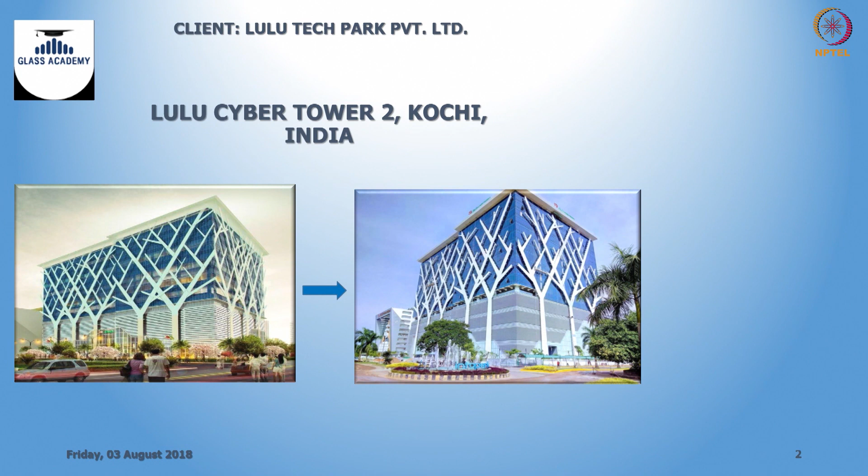Let us go through the details of this particular facade. It is a ground plus 19 building, having from around the 9th till the 19th floor commercial space. It is normally a fully cladded building for high energy efficiency.

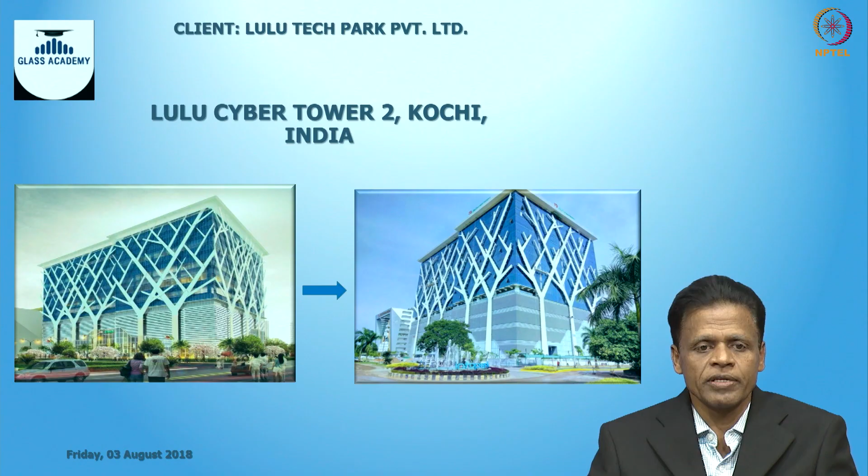If you see the building up to the 8th floor, it is used for a multi-level car park, where we used a technique of ventilated facade using louvers and rain screens. In addition, on every elevation we have a concept of a tree growing from the ground till the top of the building. This aspect makes the building unique in the space. I think it may be the first time in the country we tried something like that.

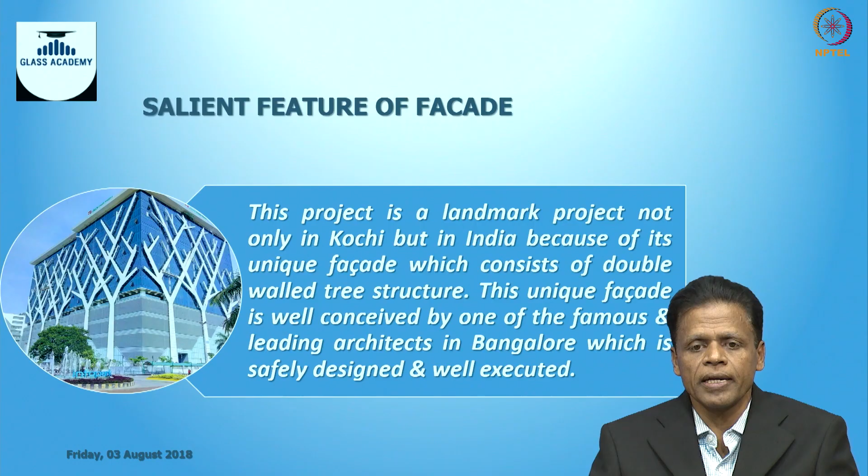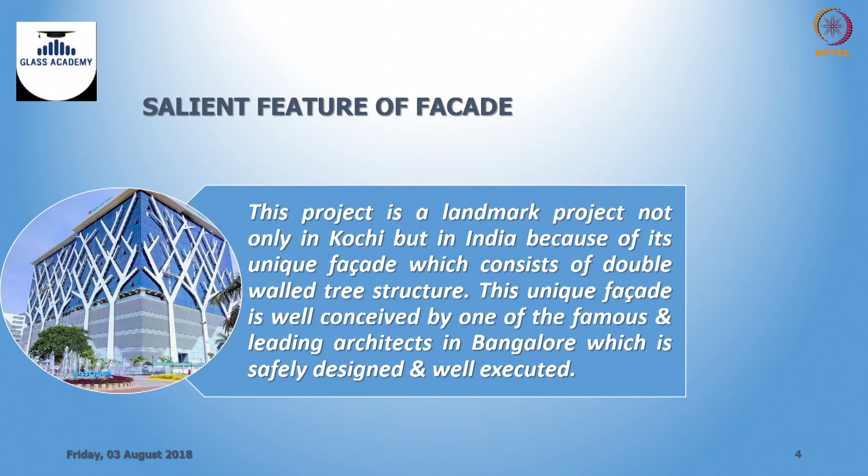Going for the project details, we have a big project having around 1.5 million square feet of space, out of which around 1 million is for commercial purpose, and one floor is fully dedicated for common space, food court and all, and the lower areas dedicated for parking. It is good for around 1000 car parking.

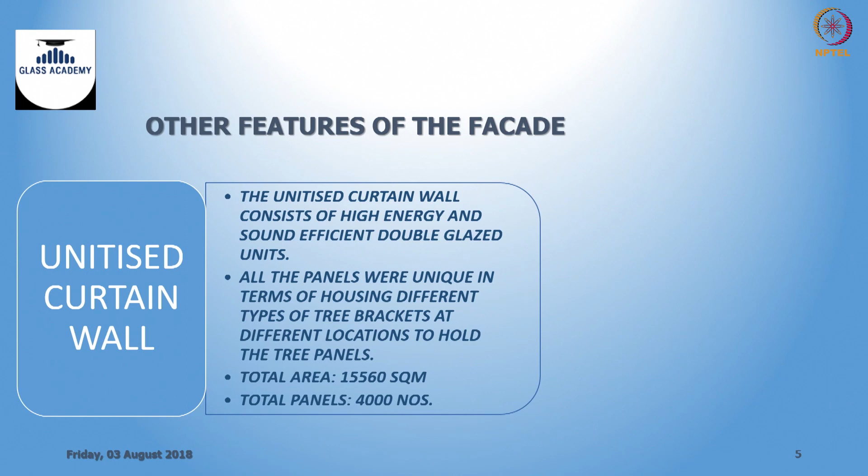So coming to the features of the facade, we have a unitized curtain wall. It is a highly energy efficient facade, and all these panels are designed in such a way that they can carry the load of the tree panels also.

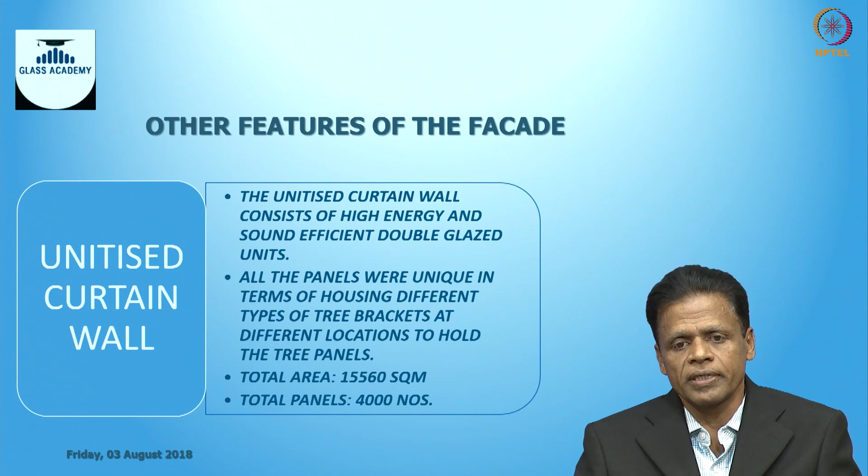If you see further slides, we have trees which are designed growing from the ground, but not touching the ground. So the panels from ground till the roof are attached to the facade, and each panel, around 3 meters high or floor to floor height, is hanging from the facade.

So it is not the construction technique of building one above the other, even though it visually gives the impression that it is built like that. Actually, these 6-inch thickness tree panels are produced and hung from the facade. So facade design was also a challenge, where it had to satisfy all the facade requirements and the additional function of carrying these tree panels individually.

So the challenge was very high, because in the unitized system itself we had to find space to accommodate hidden brackets, which will be connected to the tree panels separately by brackets, which you will see in time.

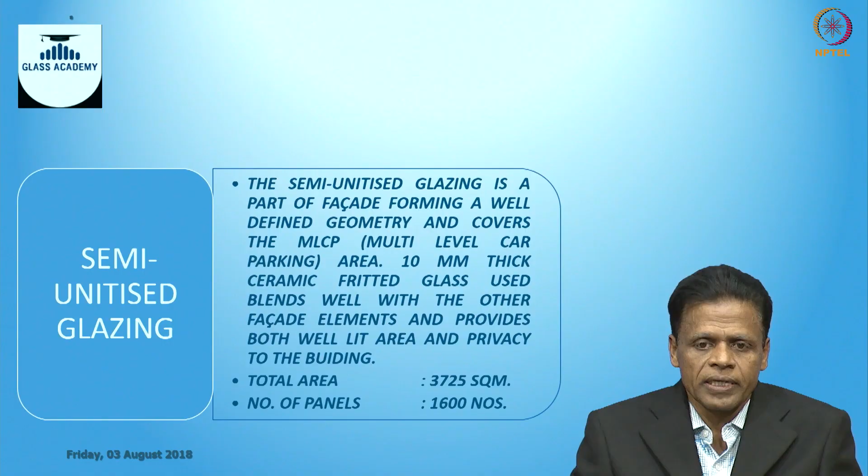In this MLCP area, we split this building into two: above the 9th floor for commercial space with the facade, and down to the 8th floor we dedicated for car parking. The requirements are also totally different, as this area is not an air-conditioned area. We need to have sufficient ventilation and light.

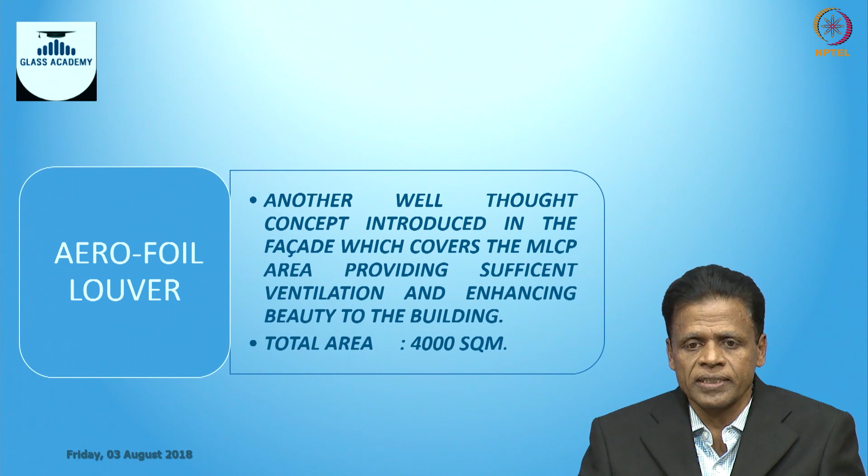For the bottom portion till the 8th floor, we designed a normal curtain wall, semi-unitized, split into 3 different areas. One is a rain screen having ceramic frit glasses, another is a Kalzip area, where a special kind of cladding is provided to break the monotony of the building till the 8th floor, and we have aerofoil louvers which ensure sufficient air circulation in the building.

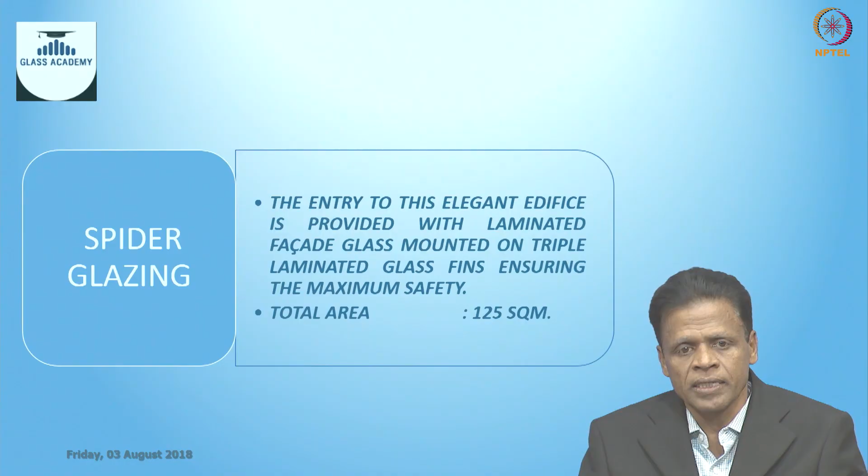And there is a special entrance for the building, shown in the next slides, giving a very grand look for the building.

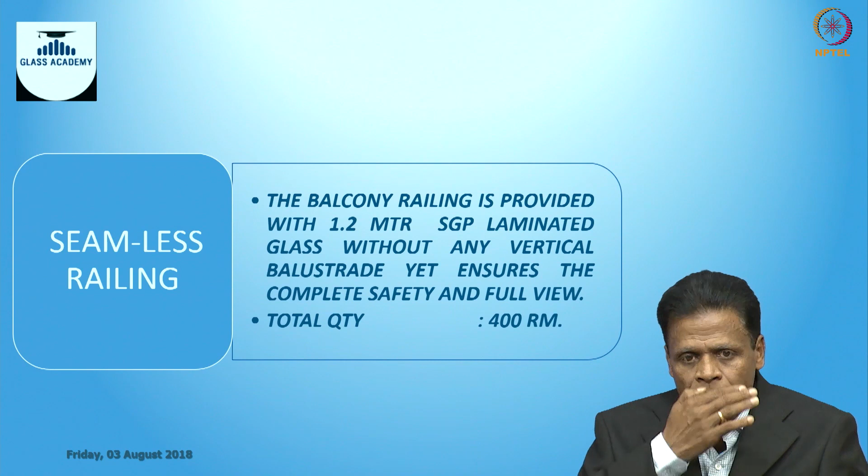And if you see the 8th floor, it is almost like an open concept where 2 to 3 meters of the periphery is open for free movement, with a railing which is totally frameless, with no vertical supports — we call it seamless railing.

If you see the quantity summary, the building is provided with around 16,000 square meters of unitized glazing. We have tree panels of around 6,000 square meters, comprising 16 trees growing from ground to terrace. We also have semi-unitized glazing for the lower area, which includes 3,700 square meters of rain screen, around 4,000 square meters of aerofoil louver, and an additional Kalzip cladding of around 1,100 square meters.

If you see the entrance, that grand look is given by providing around 125 square meters of spider glazing, and we have almost 400 running meters of seamless railing around the building periphery at the 8th floor.

This is a unitized building from the 9th to 19th floor. It is a normal unitized building. The entire area is cladded with vision panel and spandrel panel.

The only difference in design is that every panel, wherever required, has a provision given in the form of hidden brackets. The extrusion design itself takes care of that space, with a special space given in the shape of a Z which can carry the hidden brackets. Later this will be connected to the tree panels.

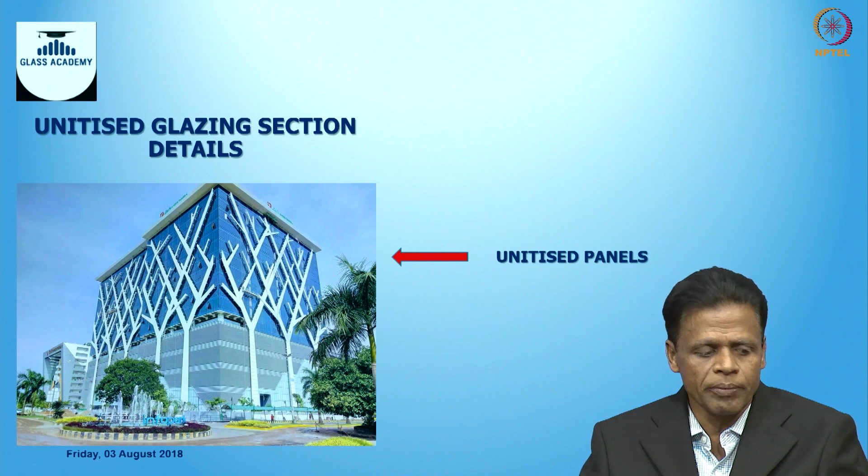Surprisingly, this particular tree panel is also all unitized construction. There is a frame all around giving provisions for bonding with the outer skin and inner skin, and this skin construction is by solid aluminum sheet of 3 millimeters which is powder coated with 25-year warranted powder. This is the tree panels.

If you see, up to the 8th floor we call it the tree trunk, since it is starting from the ground. From this slide you can see it is around 3 meters wide at the bottom which is not touching the ground. We are leaving space for free movement. Every tree panel can move a little bit, and each panel is attached to the respective area either on the unitized panel or semi-unitized panel. Special care is taken for this particular purpose.

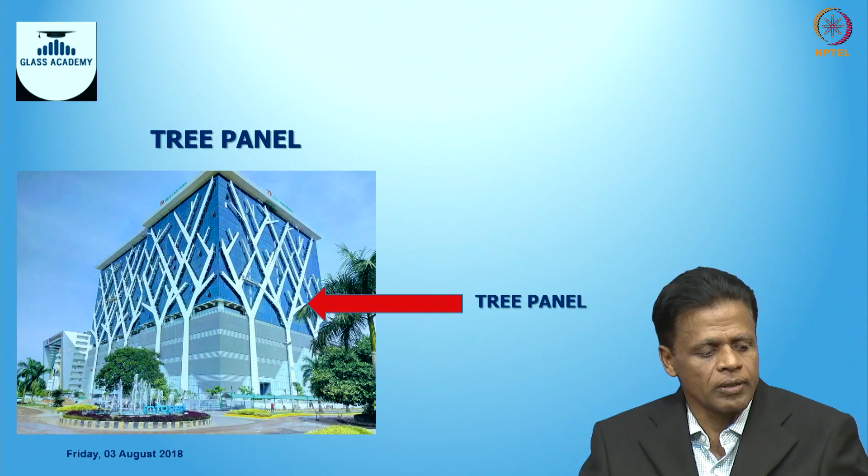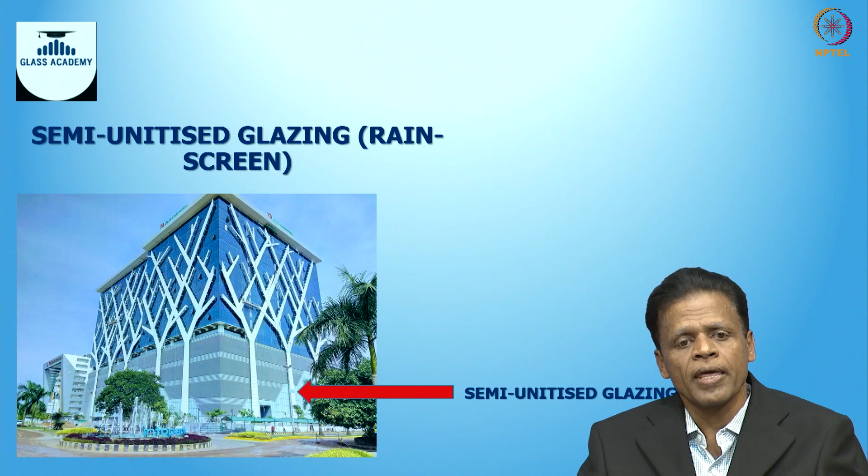You see the semi-unitized area till the 8th floor split into 3. We have rain screen with ceramic frit glasses, Kalzip cladding all around to break the monotony, and aerofoil louver to give sufficient ventilation.

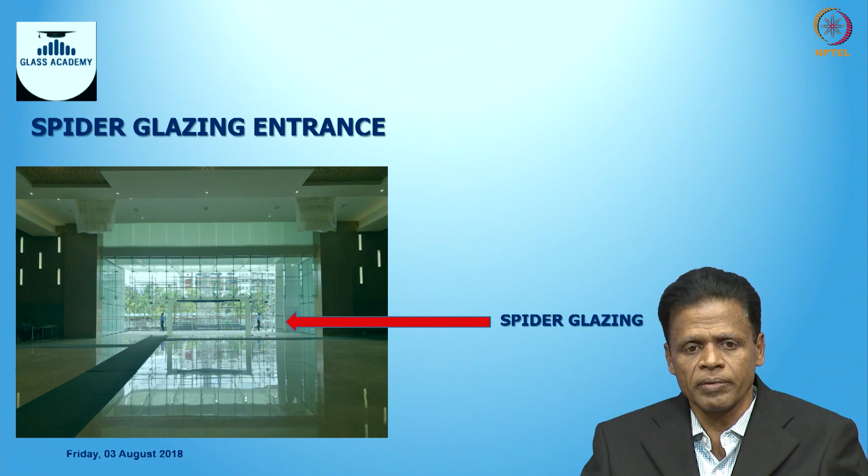And you see the spider glazing - earlier I told you there is a grand entry to the building provided with the help of glass fins, and we have not used any metal members there, it is with the glass fin and spiders. This is the one given all around the building, seamless railing where vertical balustrades are not used. The top member is just to hide the lamination.

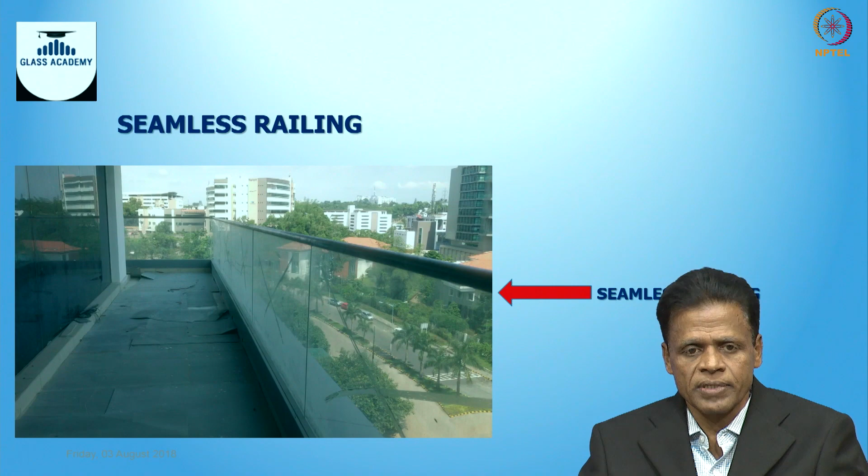These are all 17.52 SentryGlas laminated glasses, and each glass is structurally cantilevered from the bottom. At the bottom there is a hidden wedge which is around 150 deep, hidden in the upstand. This 150 will carry the glass and it is freestanding.

This U channel is provided for the recessed area. Since it is a recessed area, there is no system used, it is not unitized or semi-unitized. Here we have used a simple U channel top and bottom, which is almost hidden from the elevation, and this area is for the food court of the building.

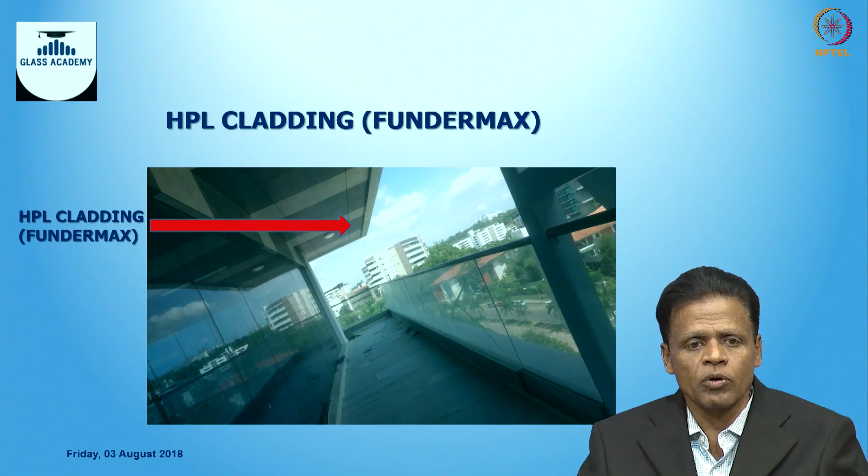And if you see that difference, that recessed area ceiling all around the building - since it withstands water entry or moisture, we have used HPL. This is a special product of Fundermax used here. And you can go to the details of every section.

This is the aerofoil louver, given for around 1 meter width all around the parking space, in the MLCP area, where sufficient light and air circulation is ensured. This is a special kind of louver designed for this particular purpose.

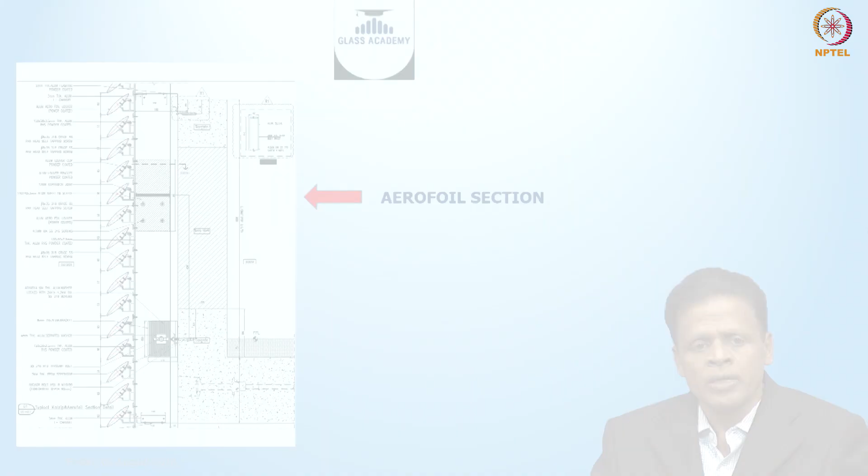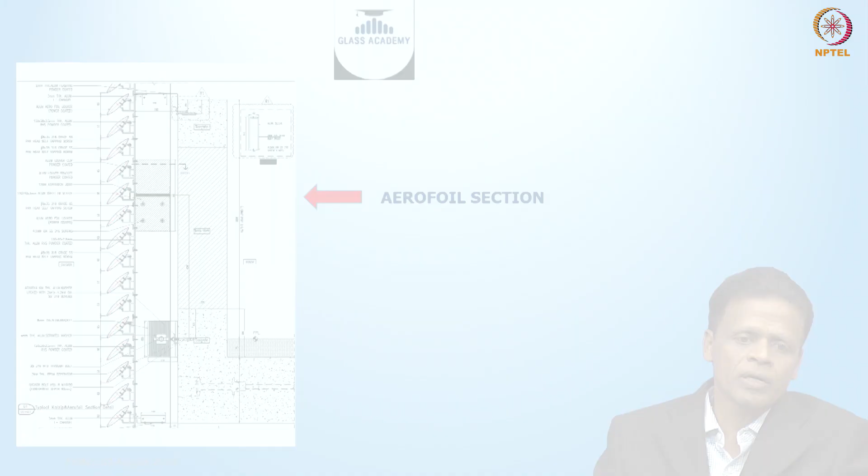No fixing mechanism will be visible from the outside, everything is hidden. A lot of design has gone into this, with special hidden brackets and extrusions designed, so all fixing techniques ensure that when viewed from the outside elevation, it is a clean, nice look of the louvers.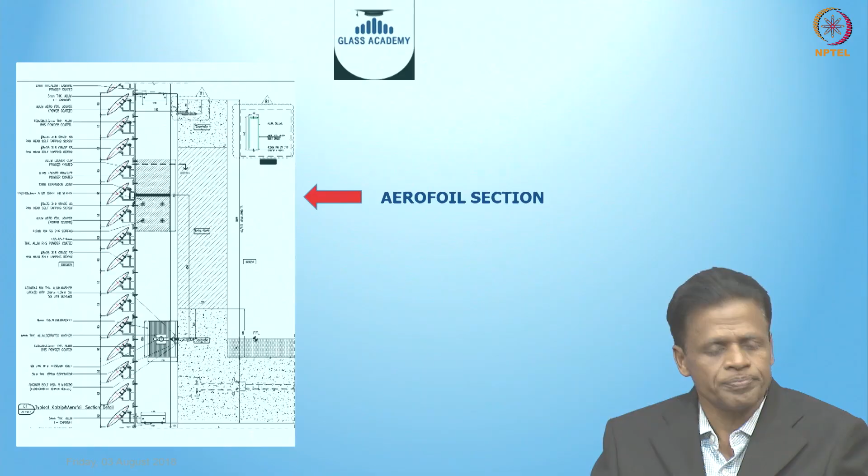There is no even fixing screws or fixing mechanism visible outside. This comes all around the building. Out of the 3 meter floor height for the MLCP area, around 1 meter is taken care of to give sufficient air circulation. This is the fixing mechanism in plan.

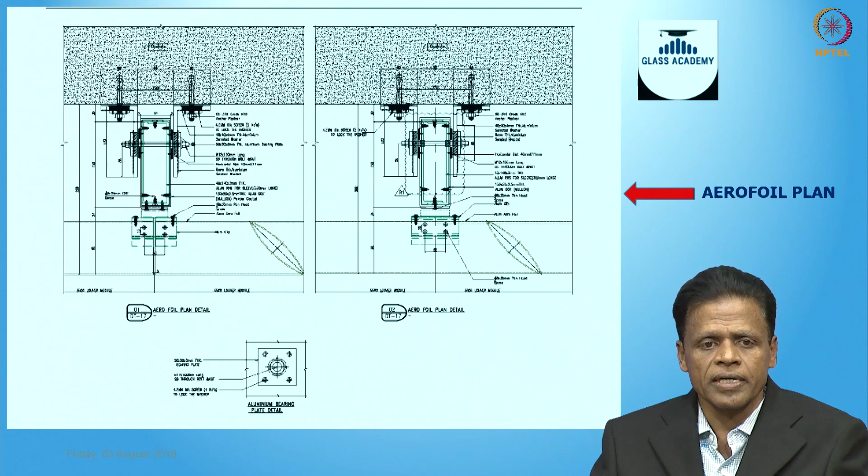All the louvers are around 150 wide, fixed with the help of hidden brackets and hidden cleats. Everything is a special design; the consultant has given special care for these concealed designs. Another aspect of this design is the Kalzip, where rain screens go floor to floor, and a 1 meter louver ensures all the air circulation.

The 1 meter area is taken care of by a product called Kalzip, which is like a little corrugated kind of facade, adding aesthetic value to the building and breaking the monotony, otherwise it would have been a single level facade from top to bottom.

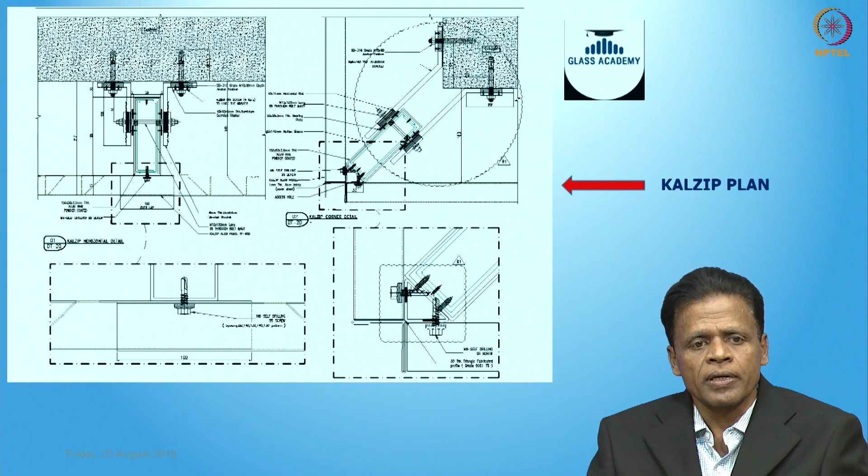If you see the details here also, similar fixing mechanisms are introduced, where concealed brackets are fixed from the building, and it is a clip-on system where no fixtures or screws will be visible.

The entire semi-unitized area up to the 8th floor we call the rain screen, which gives protection from the rain. This is mainly glass, and we have used white ceramic frit glass to give an elegant white look for the bottom of the building.

So every floor is split into 3: the rain screen, and on top of that, the Kalzip and aerofoil louver. The entire MLCP is lit inside, with sufficient light and air circulation given. It is an aesthetically treated area.

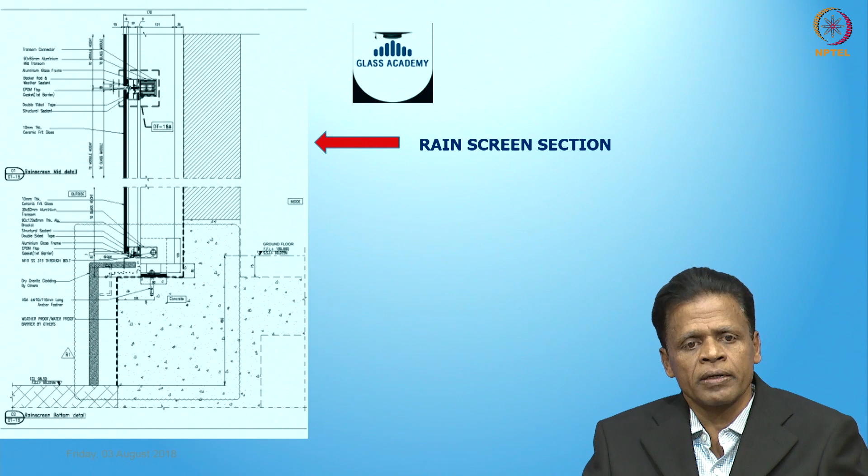Coming back to the tree, we have a lot of things to discuss. As I told earlier, a lot of design aspects have gone into this tree panel. Initially we thought of building one above the other, but later, for the movement of the panels, the facade consultant objected to that concept.

So the concept of hanging from the unitized and semi-unitized panels came into the picture. A lot of design work went into this, and finally we arrived at a product where each tree panel is also unitized, almost floor to floor, in the shape of a diamond.

So it is also structurally bonded, structurally glazed tree panels, using a modular concept. Surprisingly, even though this design shows a very lightweight structure, each square meter consists of around 30 kilograms of aluminum, with the entire perimeter section also made of aluminum, and 3mm thick aluminum skins structurally bonded to it.

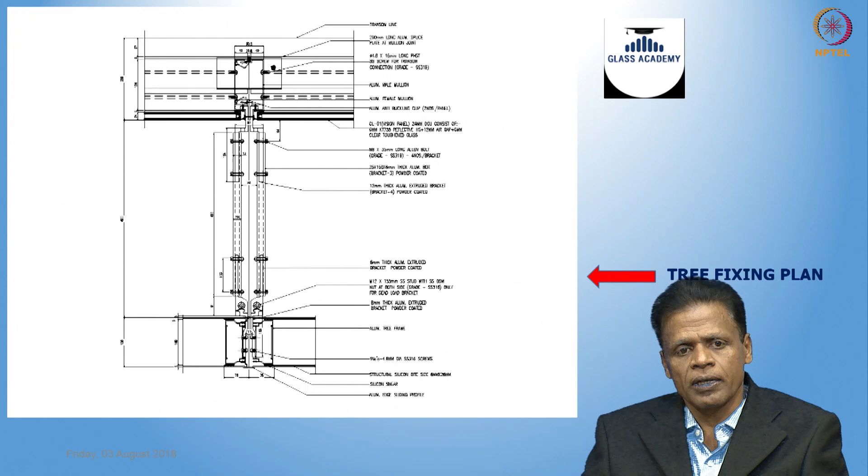This is how each tree is produced. The inner tree panels are around 600 mm away, where the same box fixing mechanism is provided for both inner and outer tree. The only difference is in the length of the connecting brackets, which will be either 600 or 750.

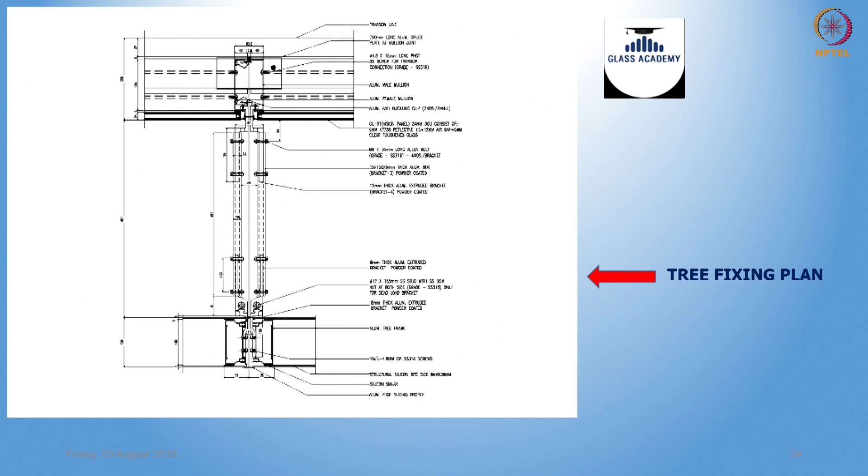This sketch shows the horizontal sectional view, or sectional plan, of the tree, the sectional plan of the facade, the unitized panel above the 8th floor, and the clear connection details between them.

Regarding the tree trunk, the upper tree panels have around 1 to 1.2 meter width, varying going upward. But coming down like a tree, it grows wider, almost touching the ground where it is around 3 meters. So we have to deal with 3 meter wide panels, and every floor to floor is 3 meters down for the MLCP area. So every panel is almost 3 by 3 meters, but going forward it is tapered.

This 3 meter by 3 meter panel is split into 3 to handle it properly, otherwise it is very difficult to handle. Every panel in the lower portion is split into 1 meter height panels of approximately 3 meter width. This is 3 times heavier than the upper panel, so special care is taken to fix this without touching the ground.

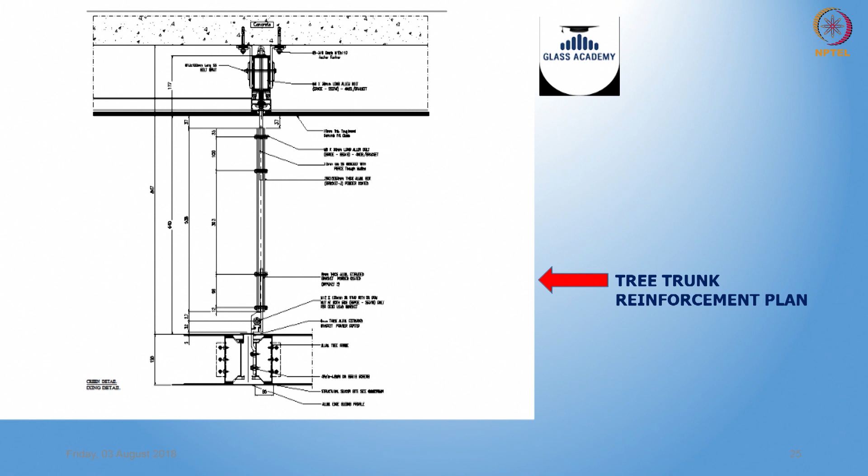If you see the sketches, this panel is attached to the rain screen area of the building. Before attaching, the vertical mullion member of the rain screen is heavily reinforced inside with stainless steel elements. The entire mullion where the tree is attached is first reinforced with thicker stainless steel plates, and heavy brackets are used for these cases.

It is very heavy, and the connection details towards the tree are kept the same, similar to the technique used for small tree panels. But the connection between these two becomes very heavy, and the mullions are heavily reinforced.

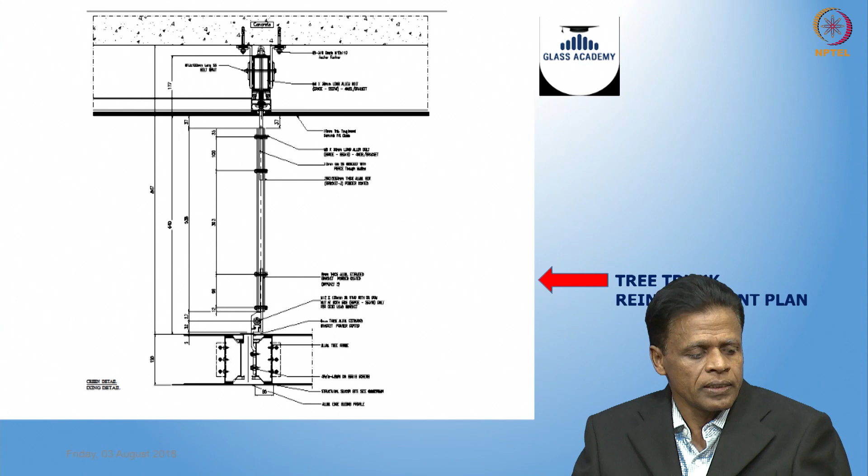This is the detail of the tree where you can see it is 150mm, 6 inch trees. There is a hollow section, slightly tapered, running all around, connected together with corner cleats, and space is created for bonding the 3mm thick aluminum sheets. It is structurally bonded to the aluminum without any mechanical fixtures.

After bonding and erection at site, the entire exposed edges of the tree are provided with a capping to make the look very neat and clean. So at site, the entire exposed periphery of the tree trunks and branches is completely closed with a special kind of cap, which you can see in the sketches.

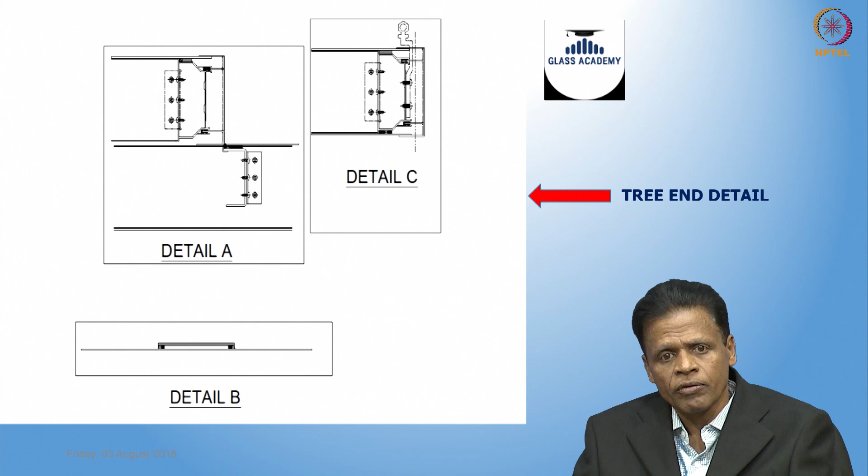This is the detail elevation where 2 tree panels go crisscross. As I told you, these 2 tree panels touch each other but do not coincide or hit each other. The reason is the alternate tree panels are designed with a distance of 150 mm, which is the thickness of the tree panel, so the inner and outer tree panels overlap each other rather than hitting each other.

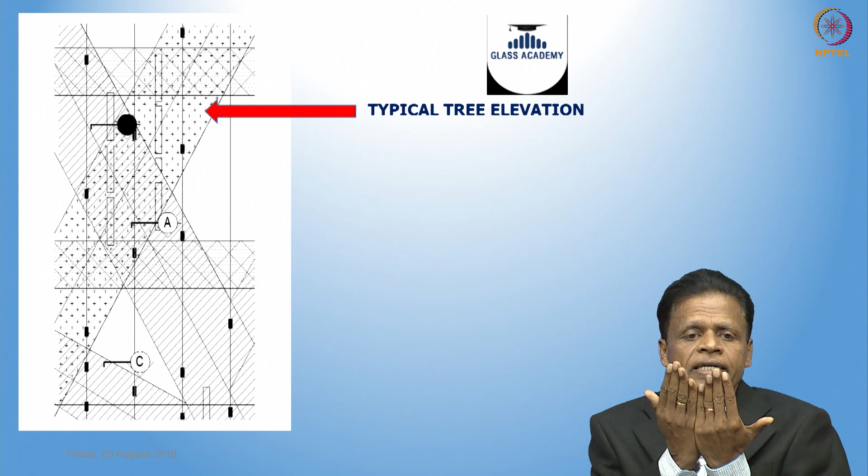This design and construction is the same; only the connection distance between the building and the tree varies by 150 mm. This elevation shows the tree separately, where the shaded portion is the common area where one tree overlaps through the front side of the other tree.

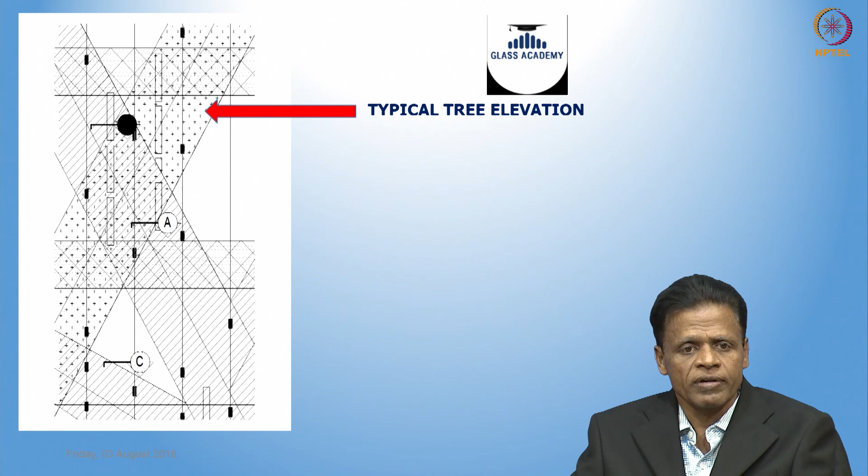On the tree side, these hidden brackets are given inside the tree during construction itself, so the provision of connection is already made. These specially designed brackets go inside the heavy aluminum box sections, again kept in position with the help of 4 bolts, and flexibility is kept in all connections for alignment purposes.

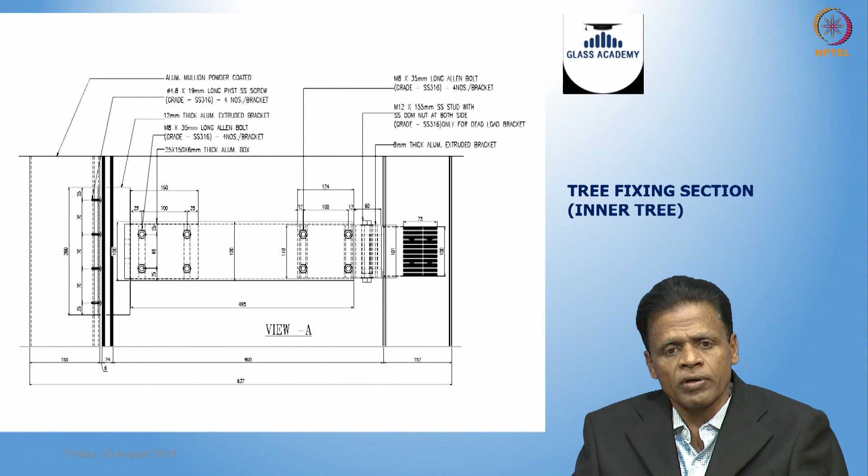The technique of cleaning the tree panels and facade is the Spiderman technique, where movable hooks are given on top. People will go through this 600 mm space and clean the building facade and the rear side of the tree panel. To clean the front side of the tree panel, a building cleaning mechanism is given on top, where they can freely come and clean the front face of the tree.

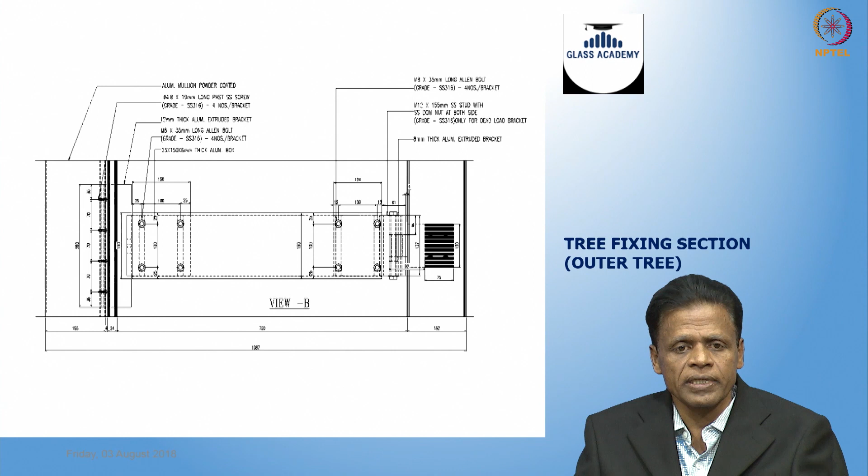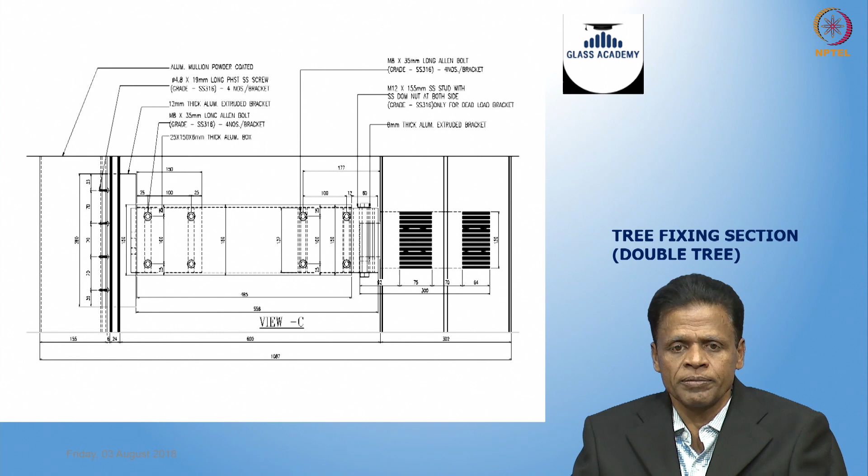As I told you earlier, this particular design had the challenge of finding a unitized panel, or the design of the unitized panel had the challenge of designing something with the flexibility of carrying the tree panels. So if you see the unitized construction, the mullions — male mullion, female mullion — already have a space created on the front side which can take this Z bracket.

It is very clearly shown in the sectional plan — the Z bracket is hidden and housed within the mullion, and with the help of around 8 screws, these brackets are secured to the unitized mullions, where we have male mullion and female mullion.

In this particular building, we have around 4000 unitized panels above the 8th floor. Even though the building shows typical panels, every panel becomes unique or different because of this bracket position. Every unitized panel is 1.1 meter by 4.2 meter, and is counted separately because every panel has its provision for these brackets at different locations.

Every panel is numbered serial-wise. In any unitized construction, the advantage is standardization — one particular notation would typically cover 1000, 500, 2000, or 2500 panels. That technique we couldn't adopt here because of this tricky situation of tree bracket positions.

Every tree bracket position is mapped from the scaled drawing, and the numbering of the tree and the panels is done accordingly. The challenge was sending the panels without this bracket — if you attach this bracket in the factory itself, transportation becomes a tricky affair. So a provision is created and marked, and the panels are sent to the site with a particular notation, and these brackets are fixed at site after receiving them, otherwise we could not transport this panel safely.

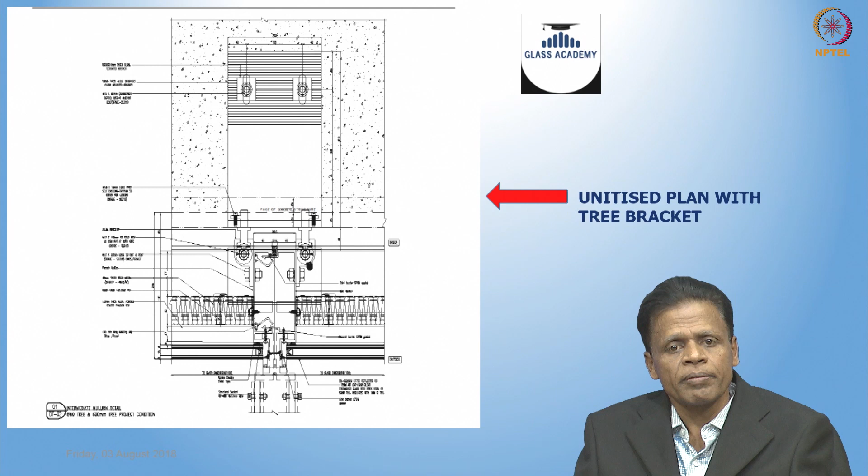Coming back to this, it's a very clear blow-up of the tree bracket fixing, starting from the front side of the mullion, the unitized male and female mullions. We see that a particular space is created for the Z bracket, coming from there, and on both sides we have hidden brackets, Z-shaped, which are secured.

That space is created almost exactly to house this bracket sufficiently — it's a tight fit. In addition, before putting in the gaskets, we have hidden screws to make it more secure to the mullion, and the brackets come out already giving provision for receiving the heavy duty aluminum brackets. You can see that very clearly.

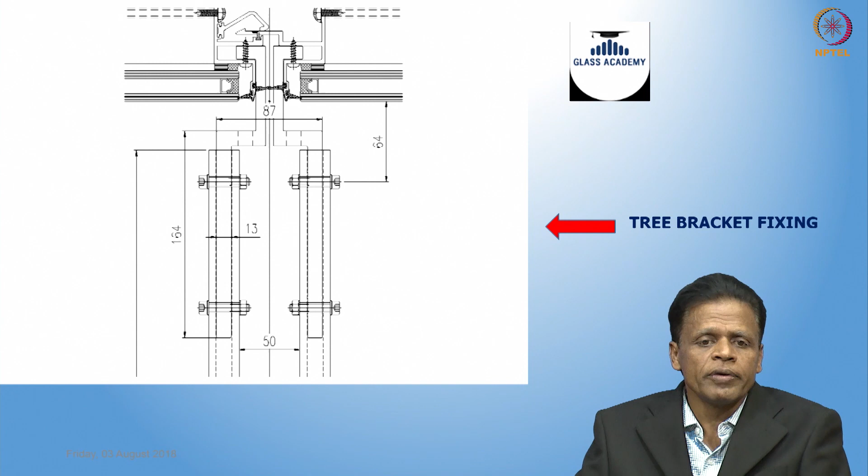So the Z bracket comes up to 164 mm from the facade, giving a clear provision to connect the hollow brackets, which in turn are used to connect the brackets from the tree directly. This is a particular unitized section where all the details are given here. The transom is a normal design, as I told you.

The mullion has a special design because of housing the brackets. It's a normal facade having around 220 deep mullions because of this additional load of the tree.

If you see the building, around 25% of it is shaded. So the purpose of giving this tree is not only to give a different look to the building, not only to address the aesthetic issue, it is an additional responsibility of giving shading to the building. Here there are no other shading elements, no louvers provided, no chadjas provided.

So the shading function of the building is done by these tree panels only. Around 25% of the entire facade all around is taken care of by the tree panel, which gives sufficient shading to the building. At the same time, since we used sufficiently open light transmission glasses, the glass used has light transmission of around 54%. So if you see any part of the building, we have sufficient lighting, around 300 to 400 lux level anywhere, which is the requirement of the IT space.

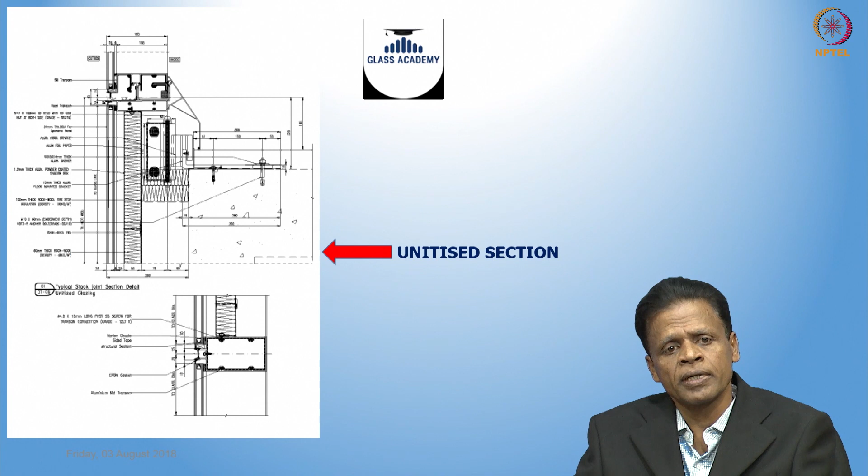This particular space will be used for commercial purposes. Above the 9th floor is fully for commercial purpose only. We have 1 million square feet, and the below portion, as I told you earlier, is for parking purposes.

This is a particular section showing a normal construction of a unitized panel construction, where mullions are shown with anti-buckling clips on both sides, where sufficiently heavy duty mullions are provided. This is a particular section where we cannot see any tree panels, because many mullions are there, so there is no provision of trees required at all.

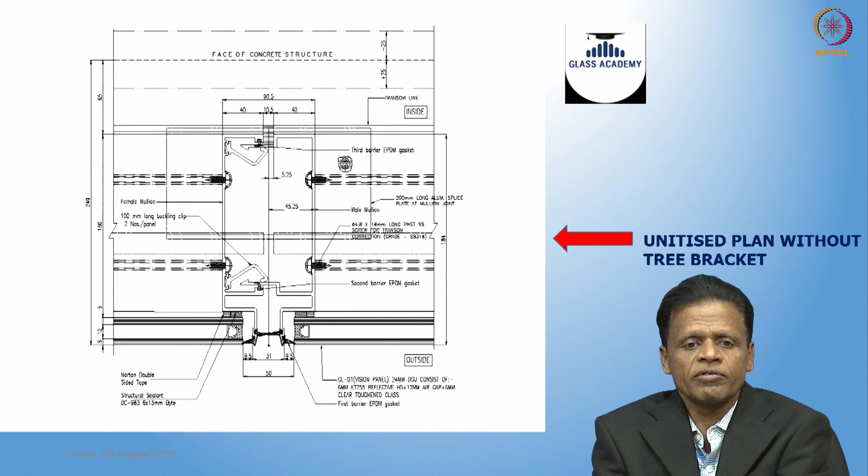So this is an area where there are no tree brackets, but the space provided for this is still there. Suppose a tree panel is coming, immediately we have to insert a Z bracket through that space, secure it with screws, and later the connection has to be taken.

Once again, the most important aspect was the unitized construction. Usually unitized construction will take around 8 kg of aluminum per square meter. Here it was a little heavy duty - we consumed around 10 kg per square meter of aluminum because of the tree panels.

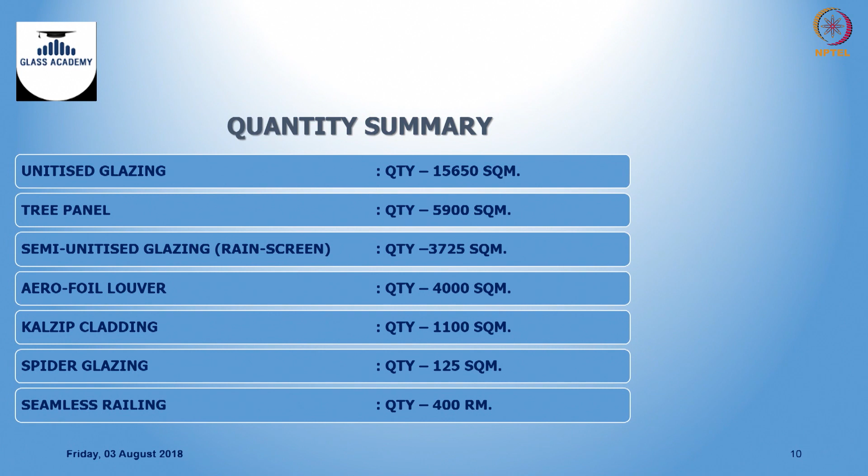Every tree is given sufficient provision for moving, and every tree is not touching each other. It is like an earthquake-safe design also.

Unitized panel is given, tree panel is given at the bottom side, semi-unitized area, and later this client came up with a wonderful lighting detail which has not been provided till date. Their options were explored.

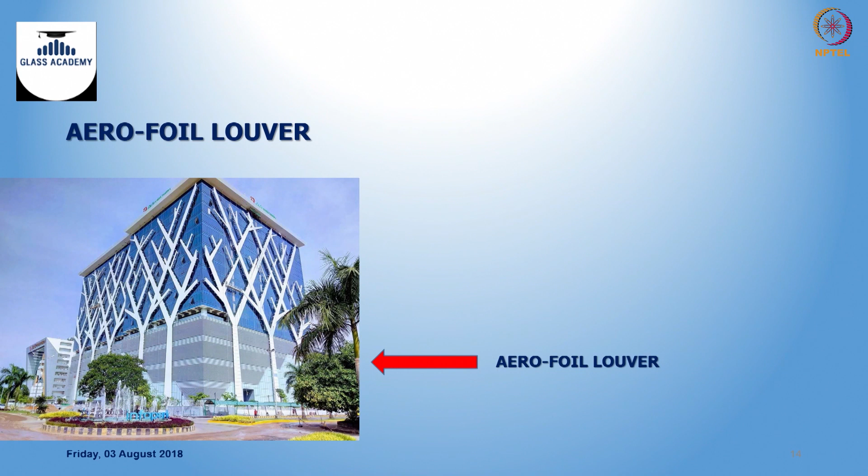Every tree will be lit from inside. So there will be a different look for the building at night. That was an added advantage of this building - you will see a different building for different days. It is a different light concept that is used, which is not incorporated now.

The challenge was to have a building with a dummy facade, which was the first time in the country. We were also very skeptical about taking this challenge, because we have seen buildings in Europe with a total area enclosed double wall construction, but that purpose is not utilized here. It is an open concept and it is not touching the ground.

The client desired to have these panels not loading on the ground. So every panel is attached to the unitized area without touching the ground.

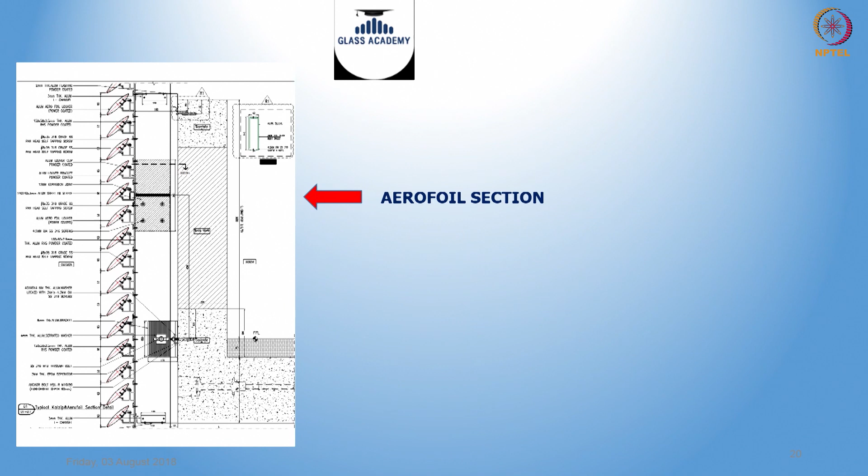The design was so challenging because of the shape. Every panel is different, going upward in inclination, and the size of the panel is changing. So for numbering also, if you see, every panel - around 2000 tree panels - are different only. Even every tree is different; standardization is not used at all here.

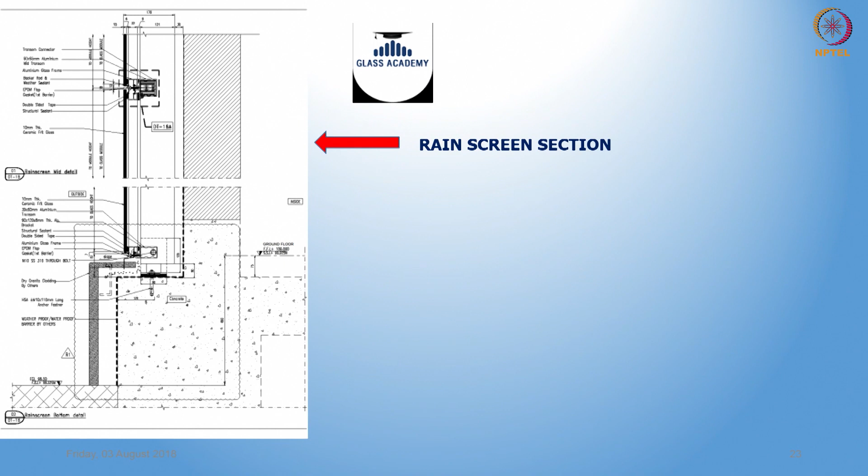A lot of people are thinking about a double wall construction now, having a full-fledged double wall construction where the entire ambience is controlled because of this. But here the purpose is not that - that technique is not utilized. The only advantage we got is for shading - around 25% of the building is shaded.